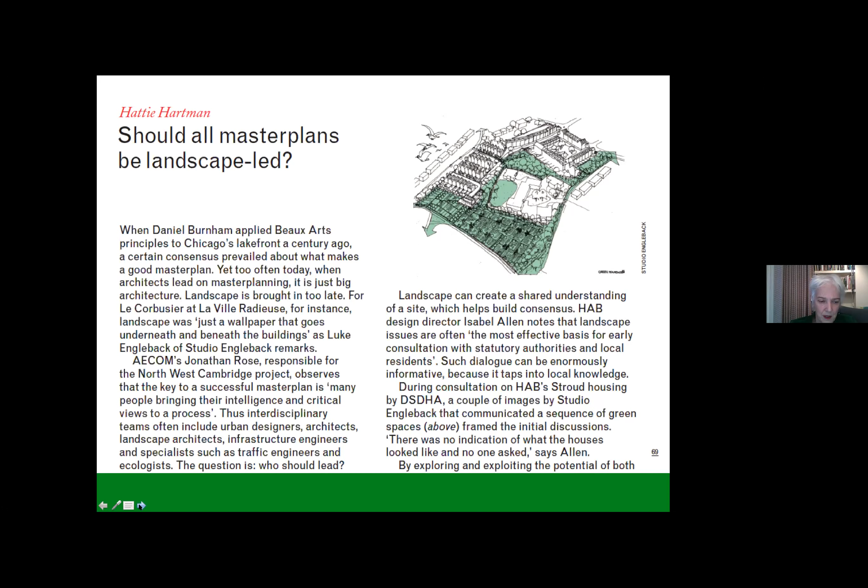And I think this is what we all need to be really cued into. It is sometimes hard to get a client to hire landscape expertise early in a project, just as hard as it is to get the structural engineer and the services engineer in early. This is what I would be interested to hear more from the audience about during the Q&A.

So a few projects—these aren't necessarily my all-time favorites, just a few that I thought I would show you. A really good source for looking at retrofit projects is to look at the AJ Retrofit Awards, which we've been running for almost, I don't know, maybe 7 or 8 years now.

When we started it, nobody really thought retrofit was such a hot idea for awards. Now we are flooded with interesting projects, and they're all on our website, and we get more and more interesting projects as the years go on.

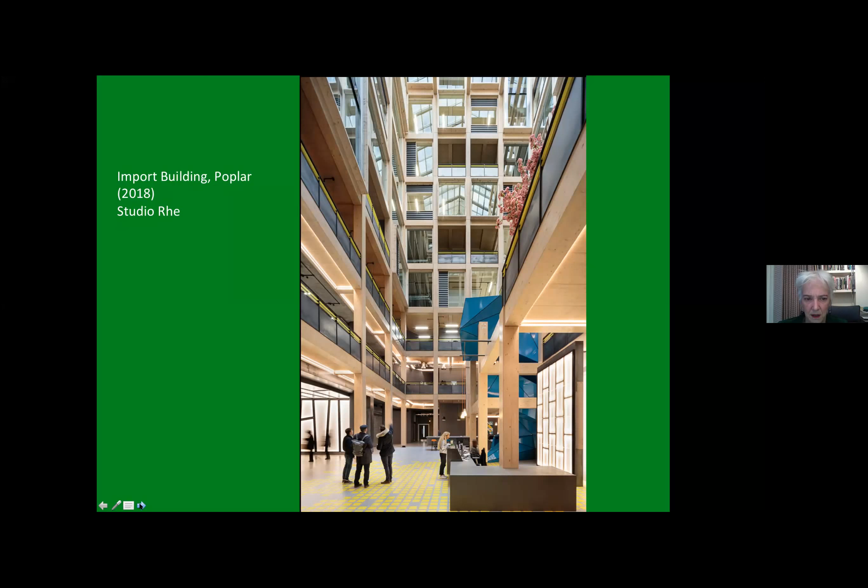Now this is a building that I came across because it was submitted to the Retrofit Awards a couple of years ago, and it is in East London in Poplar. It was a late 20th century underloved office building, and this is the new atrium, all done with CLT. That on the left is the old atrium, and this is what it looks like on the right.

I've spent about 10 years looking at buildings and trying to figure out how sustainable they really are. It's a very tricky question, every time. I went to try to find out about the mechanical plant. I don't know if there's anyone on the call who knows details about this project, but I really tried hard to find out what was done to update it, and whether they explored any mixed mode ventilation, because it's a sealed building, and I really couldn't get many answers. So these things are very tricky.

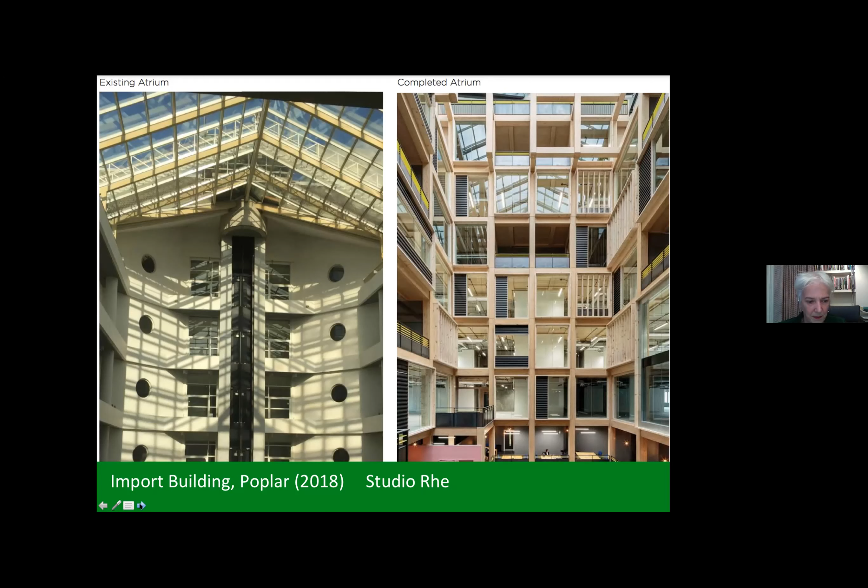This is a project that was on Dezeen last week. I haven't seen this, we can't go anywhere at the moment, but it's a beautiful train station that has been repurposed with, apparently, 12 of these CLT pavilions, which are retail within this shed structure. You can see a lot more details about it on Dezeen.

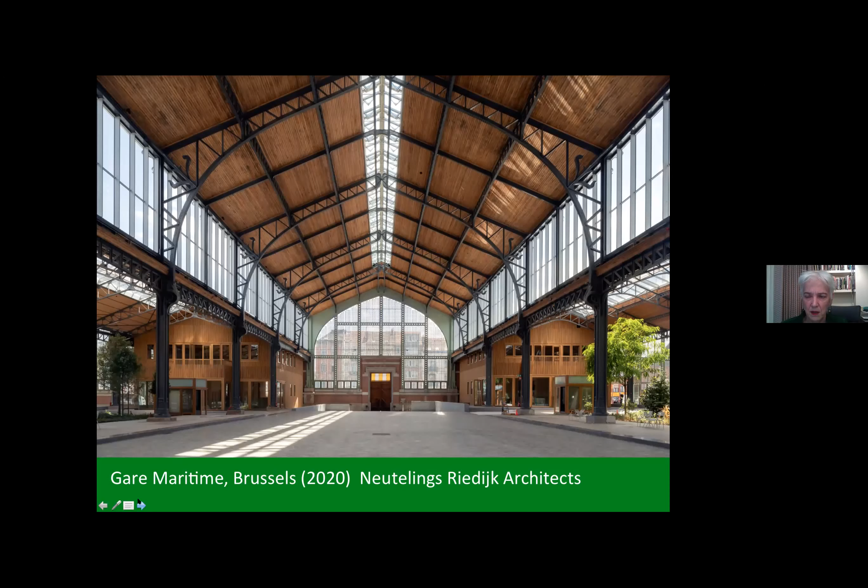I think we need to look abroad more, where sometimes I feel, at least, that I'm in an echo chamber. I have a pretty good sense of the UK landscape, but there's a lot of innovation going on. We need to look at the best projects everywhere.

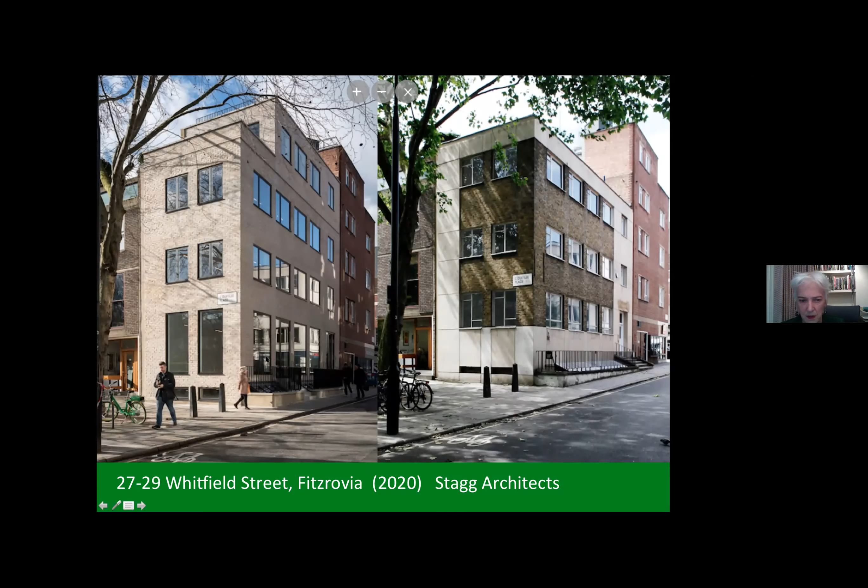Now, this is an example in Fitzrovia. This is just to say they don't all have to be beautiful train stations. They're just simple unloved buildings like this one here on the right that can be rethought, brought up to date without tearing them down. In this case, the render was taken off the facade, the existing bricks were repointed, and a kind of mineral paint was used to give this finish to the building. And this is the inside.

Not every client would want to work in this space, but basically they looked for features that they could keep exposed, and a very thoughtfully and carefully detailed stair that gives a sense of openness to the whole space. That's a detail of the stair.

So it's about the big moves, it's also about the small moves. I'm sure many of you have seen this project, and Marion, one of our panelists, probably knows a lot more about it than I do. I haven't actually been to see it, but this is a Dutch approach to housing retrofit, where a whole terrace was done by Studio Partington, and the residents remained in situ while this was done. It's quite an incredible achievement. I don't know if there are plans to do more of this in the UK, maybe someone else knows more than I do. Here's on the left what it looked like before. I'm not convinced by this pink and purple, but it has given the place an identity.

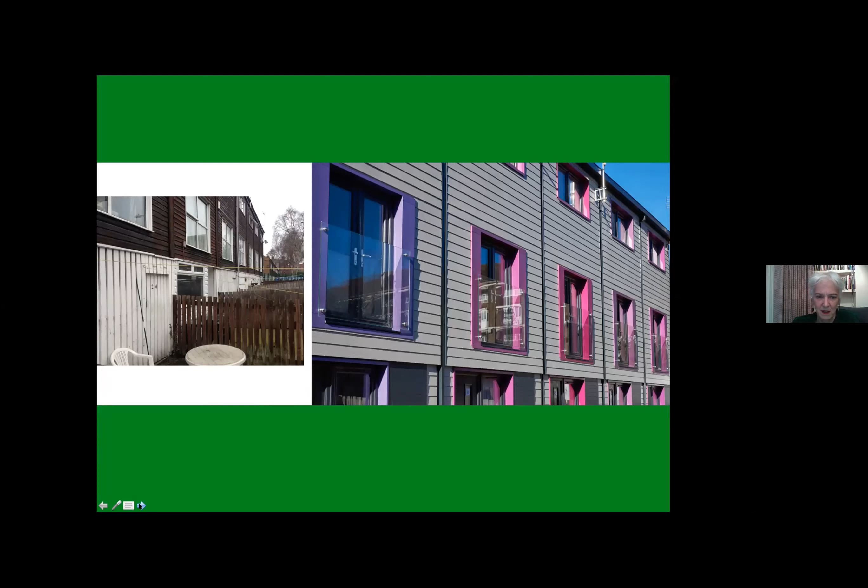Lots that can be done with one-off terraced houses. This is something else we published in the AJ a couple of years ago. It's quite an unusual project. The upper left is what it looked like before, and this is the rear extension—basically a house built around a house. So there are many, many approaches to this.

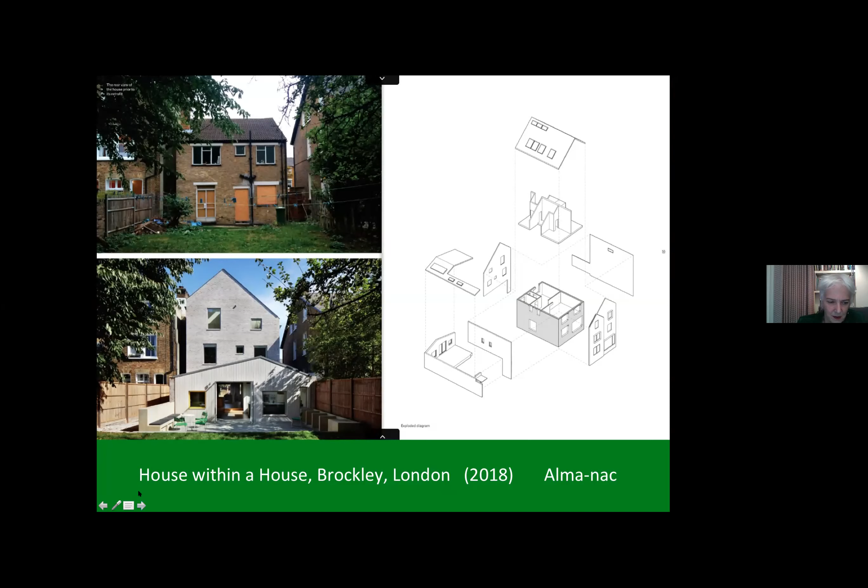There are so many resources out there, I haven't begun to list them. I hope everyone on this call knows the work of LETI, the London Energy Transformation Initiative, and the design guide that's downloadable for free on their website. I think it's been downloaded 15,000 times or more, and I can put it in the chat box. And these are a couple of others, the book on the left by Duncan Baker-Brown in Brighton is 3 years old.

I hope most of you have seen that one. This is a recent Swiss book on the same topic. And then I put this project on as a bit of a provocation that we all need to really think outside the box.

This is by BIG in Copenhagen, where they've put a ski slope and a landscaped walking path on top of a waste to energy plant. I have to say, I was highly skeptical of this whole concept and thought it was just kind of a gimmick. I did go to the press opening, and it's early days, so it's too soon to say, but this is more about the repurposing of land and how to draw people and how to redevelop an industrial site. This was a kind of industrial part of the harbor that had a few activities of this nature, like kayaking or jet skiing, and it gave them the idea to make this a sporting venue.

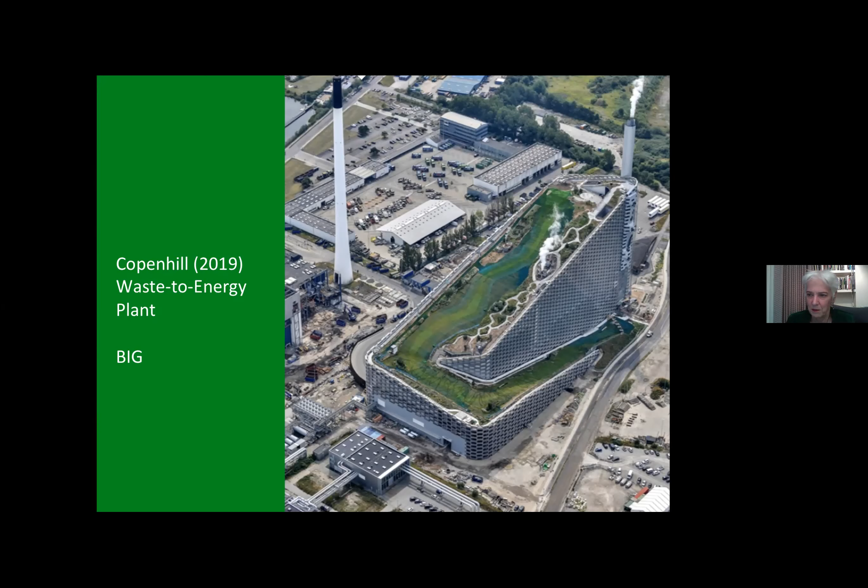We'll see if it works, but I think we need to really be thinking outside the box. And here it is. Fantastic view from the top. This is a landscape path, so you can do it just as a walk, you don't have to do the skiing bit.

Another thing we need to do is revisit our projects and learn from what works and what doesn't work, and this doesn't happen often enough. The RIBA has recently put a big challenge out for post-occupancy, and the book that I've done with Sophie and Judith talks a lot about that.

This is a revisit we did to a Hopkins project in Woking. If we ever get out of this crazy pandemic, I really urge you to go see this project. If you haven't seen it, it's open to the public, there's a visitor center at the front. I thought this was particularly appropriate in terms of putting the revisit message across, but also because of repurposing land.

This project is built over a municipal car park. Below is the car park and above is this 2-story new office, and it's absolutely wonderful inside because you're at the level of the tree canopy when you're inside. They have these 2 huge ficus which have survived, but when you're in these offices, you're looking out into the tree canopy, and it's just fantastic. I love this notion of building over the car park.

And this is what it looks like. I think it was 5 years in. We went back, we talked to people who work there, we talked to the architects, we looked at the energy. It's actually performing very, very well. Their carbon footprint due to flights, because their staff travel so much, was actually higher than the building emissions, the operational emissions, which I found really fascinating.

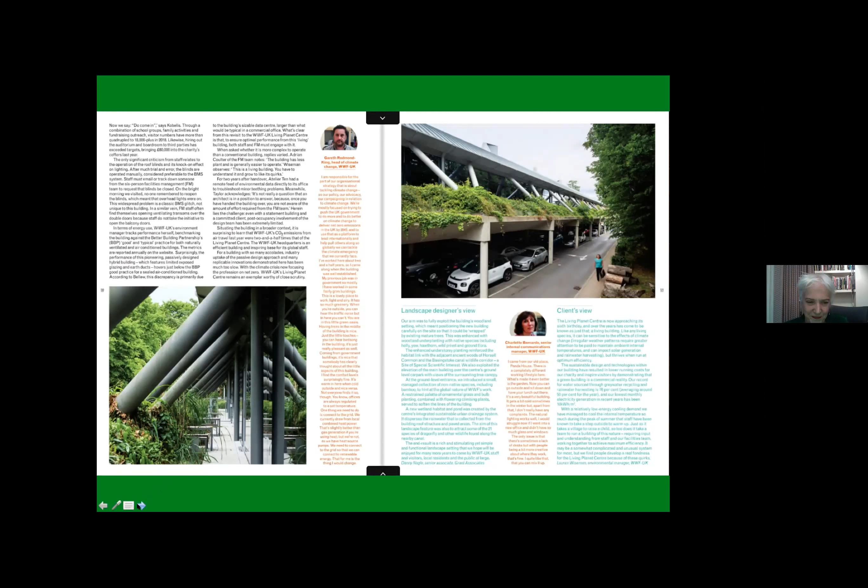Now, many of these things will be so familiar, but on every project, you need someone championing this, or else these things get lost along the way. Every single project, we just have to challenge the client with the brief. We have to examine what are the opportunities for retrofit. Can a demolition audit be done? What can be salvaged if the building itself can't be salvaged?

Use passive design to design out the operational energy loads to the absolute maximum, and also look at embodied carbon. We need to be looking at whole life carbon. Look at exemplars, look at relevant projects, think outside the box, as I said, and revisit, and then share what works and what doesn't work. So those are my thoughts.

I'm now going to turn this over to our first speaker. I'm really delighted. We have a landscape architect, we have a project manager, we have a building service engineer. I've spent my life, it feels like the last 10 years, talking to building service engineers. And we have an architect, Marion, whom I've known since I got started with this, she's ahead of me on this agenda. We don't have a structural engineer, unfortunately. They're very much front and center now with embodied carbon coming much more on everyone's radar.

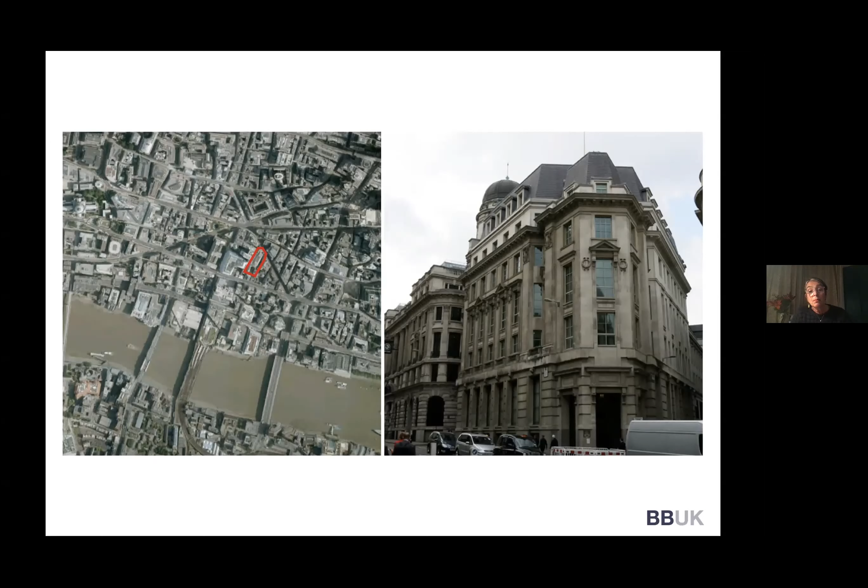So it's a site almost bang opposite the Bank of England, right in the heart of the City of London, the financial area, lots of money, lots of slick offices, lots of suited men, and some women too. But it's a fairly traditional area. This is a very traditional Victorian building that we went to look at with AHMM.

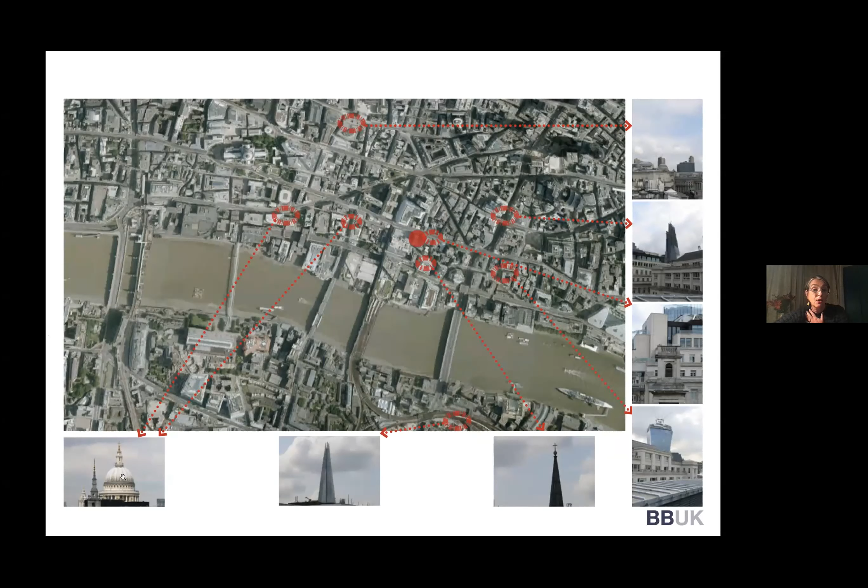It was a roof garden. I think it's slightly the wrong way around. So looking, so from the roof, you could see an iconic building — I mean, amazingly, because it's only about 5 stories high, you can see a lot of London's really iconic buildings, from St Paul's through to the Shard, through to the Barbican.

Fantastic views, but when we went to look at it, the whole of the area was covered in plant, so that you could literally just get around on a kind of gangway around the building to look out to the views. So the concept for the space was to create a square in the sky, from where the views could be enjoyed. The square would be enclosed with benches, and then there would be planting around the outside edges in order to enhance the ecology of the site, and also to frame some of these views out.

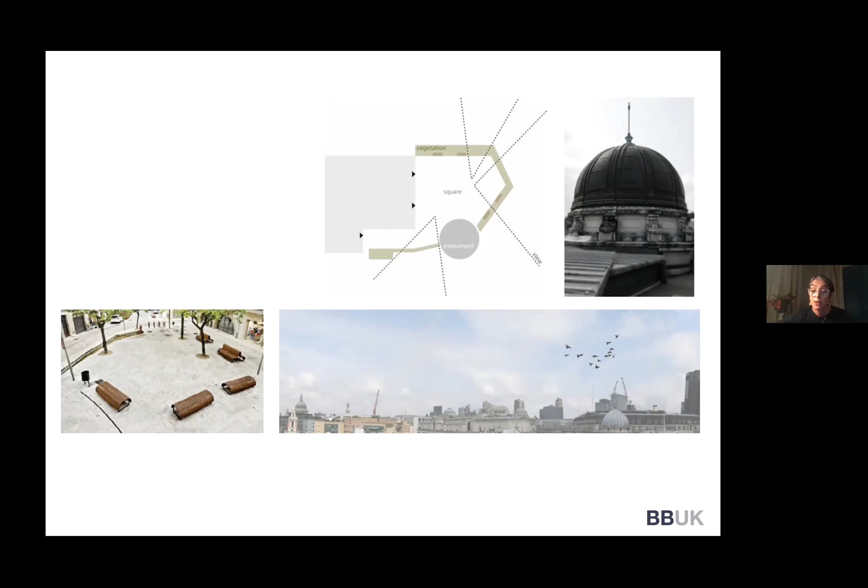As I said, the front bit of the building was being retained. Maybe I didn't say it — sorry, the front bit of the building was being retained. The back half of the building was being demolished. So it was a kind of half reuse, half rebuild.

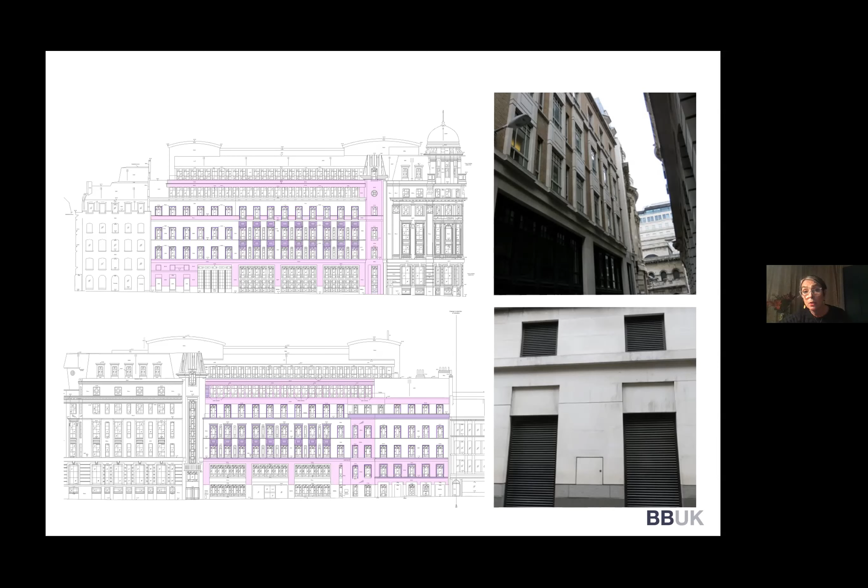But when we went to site for the first time, we were really struck by all this wonderful Portland stone that was facing the existing building. So we did a survey of what was there. We looked at the dimensions of the stone that was there. We worked out the square meterage of what was going to be coming down from the demolished building, and we proposed that this would be used as paving and cladding around the outside of the new roof garden, in order to reuse some of the materials that would otherwise be going to landfill.

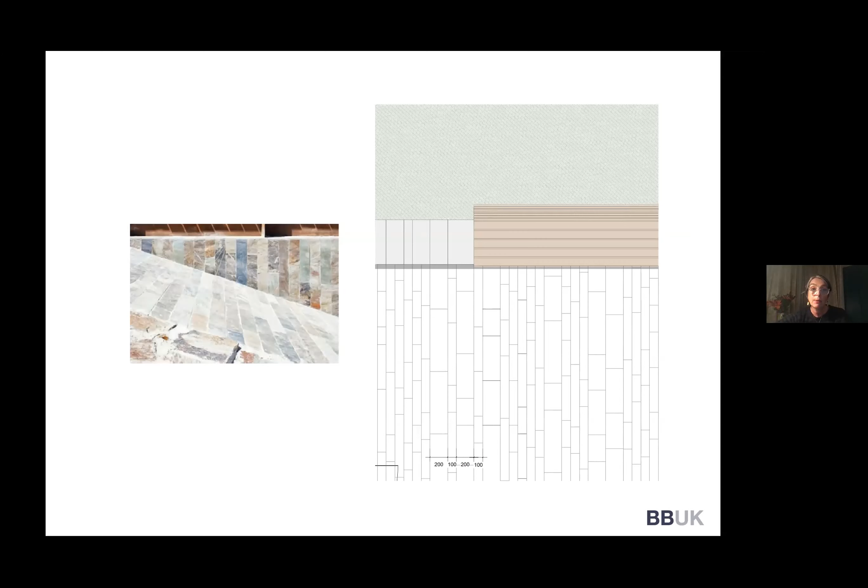So when we looked at the different widths, there were 3 principal widths of stone. So therefore, we set out a paving pattern that would accommodate those widths with a kind of random length, so that wastage could be accommodated. We then returned the paving, so it would run along the floor and then return up the cladding, so that you've got these kind of lines of different widths of paving and cladding going around the terrace. So this was the general arrangement drawing, showing the setting out of the paving, which then ran parallel to the building, but we also accommodated the slightly weird angle kind of prow of the building.

Which went out onto King William Street facing the Bank of England. We were retaining this lovely — it's not really a cupola because it doesn't let light through — this little odd building which could be used for storing stuff. When we designed this space, we didn't know who was going to be in the building.

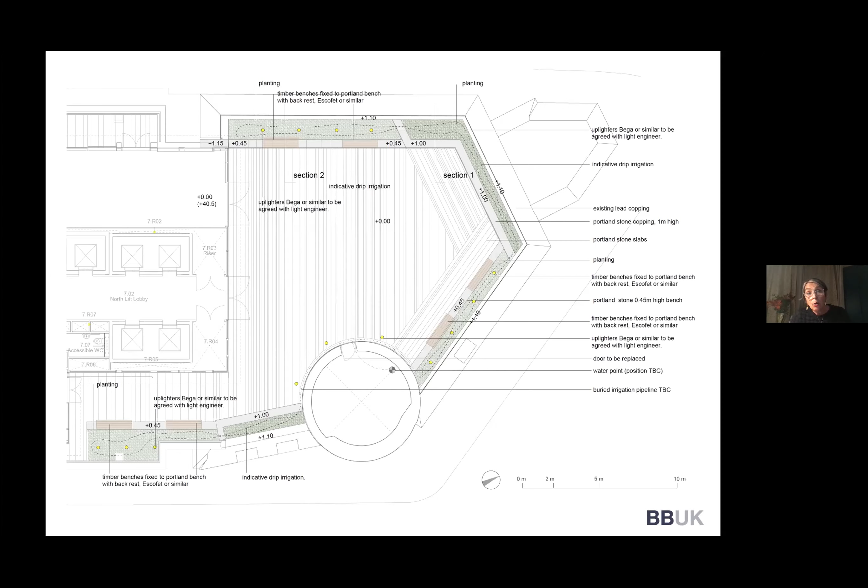We knew it was going to be an office, but we didn't know whether there was going to be one tenant that was going to take the whole building, or whether it was going to be floor by floor. So we wanted to design a very flexible space, but we knew it was almost certainly going to be used for client entertaining, for staff to go out at lunchtime and have their lunch, and perhaps have drinks in the evenings.

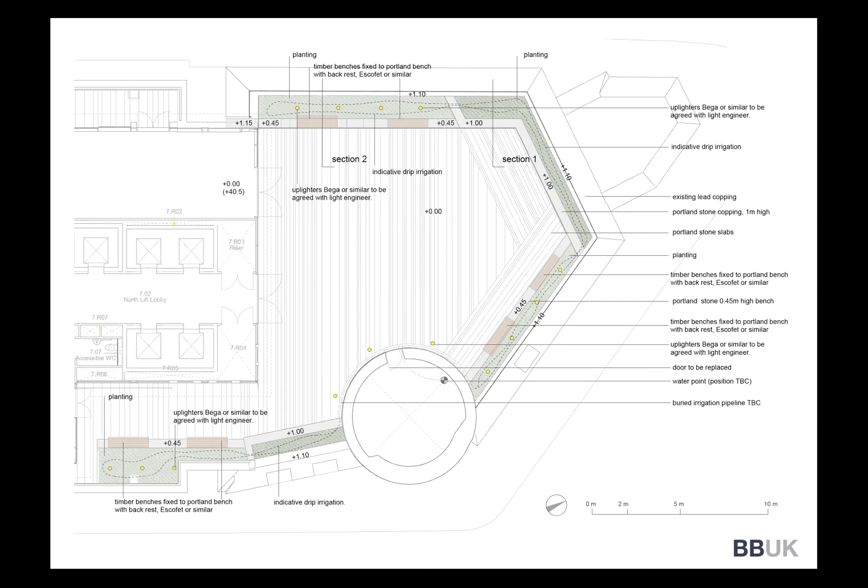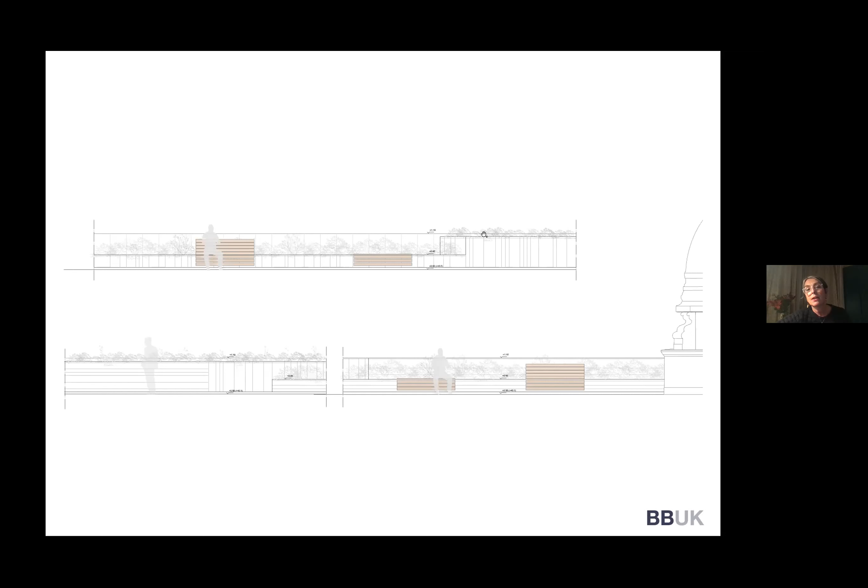So we also designed so the seating around the outside would be a retained flower bed, and then seating so you could either perch on the stone or have a more comfortable timber bench. We then had higher areas which were almost like a bar area, where you could lean, but also that was the parapet for the planting.

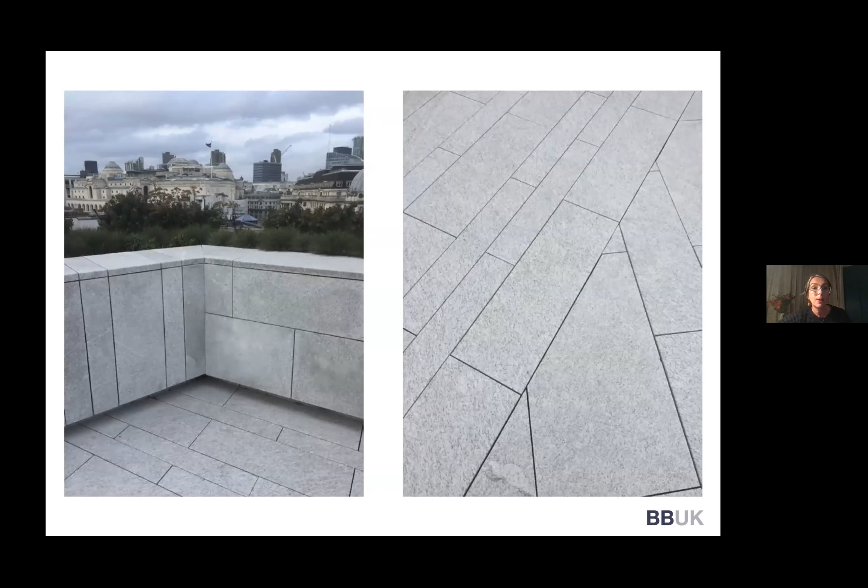And then by contrast, we were appointed - actually it was a mini competition with Mikhail Riches, who were the architects at Goldsmith Street. We did a competition for some infill housing for London Borough of Hackney and were appointed to do 2 sites. This is one of them, Wimborne Street, which is opposite Shoreditch Park - so a lot of open space, but with the barrier of the New North Road between them.

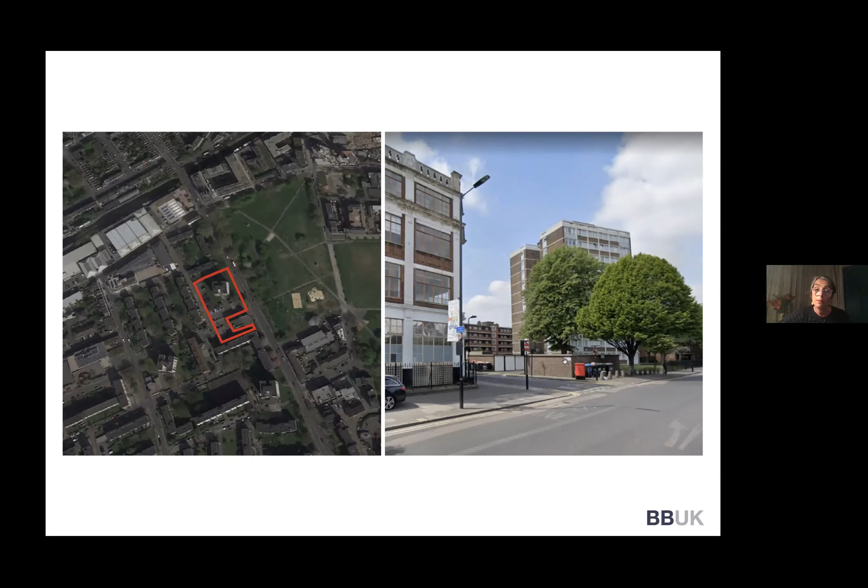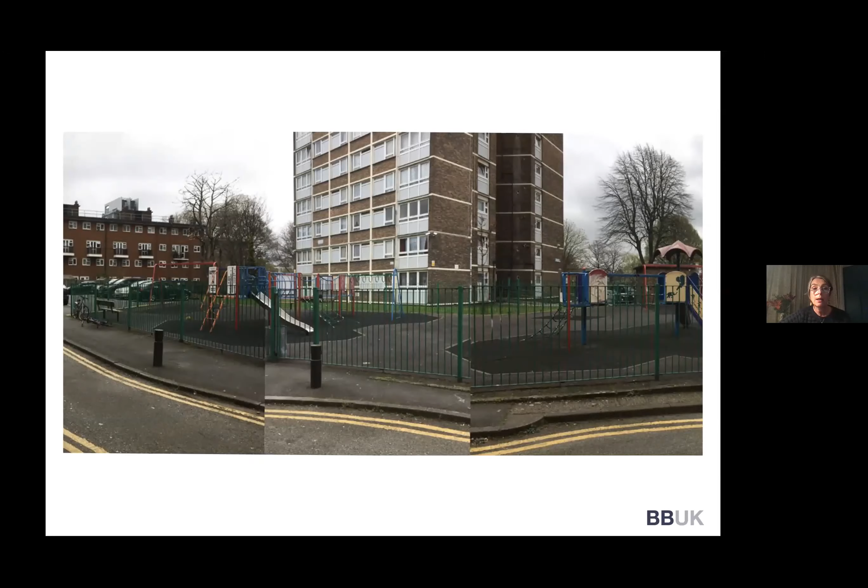So this is what was on the site initially, a really miserable play area surrounded by asphalt, quite a lot of car parking, and then this kind of unfriendly hazard paving to stop the cars straying into the wrong places, more garages, quite a lot of railings to stop you going where you really want to go. So the most direct routes were closed off with railings and low walls - this was the site boundary.

On the left is the site boundary when we were first given the project. So at the first meeting with the client, we said we can't just look at this area and do a little bit of landscape for the new residents. These guys here are losing their car parking, and we're going to need to provide new play anyway. So we persuaded Hackney to extend the site to include the area around the existing tower and all the car parking and the rather miserable play area I showed you earlier.

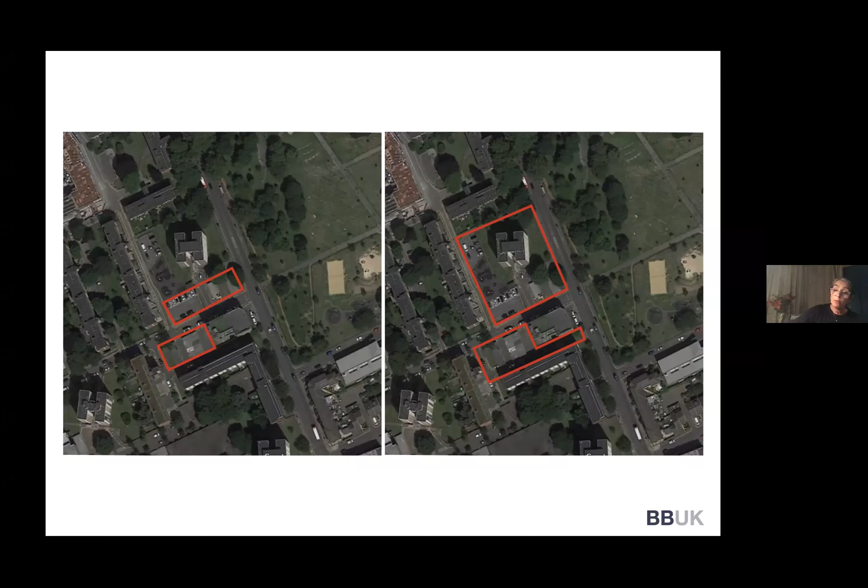So that we could actually do something a little bit more extensive. The existing site plan had a play area, car parking, sandwiching in concrete asphalt play area, storerooms and garages, and then actually quite a generous piece of open land, but it's all amenity grassland. It was all enclosed in 1.5 meter high railings, so it was impossible to get to. And then some quite nice mature trees on the site.

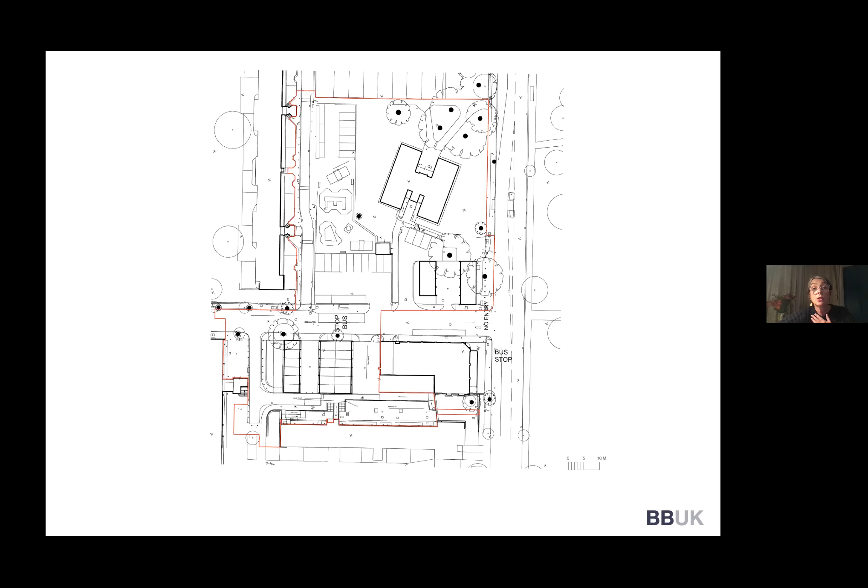So the site plan - I put this in because I thought it's important to look at the trees. We had to take out one of the really nice mature trees, a lime tree, and there just was no way to keep it. We did try every which way, but it was impossible with the root protection area to keep that tree. There was a hornbeam as well, so that was retained. We replaced the lime with 2 more lime trees that now run up New North Road. So actually there's a line of trees that go from pretty well the Old Street roundabout all the way up the road and along Shoreditch Park.

So we took the opportunity of beefing up that single-sided avenue along the left-hand side of the road as you're traveling north. We moved the car park from here, and we moved the play area much further north so that none of the buildings would overshadow it, meaning the play area gets sunlight pretty well all day.

We've put new trees in. We've added SUDS into the edges of the play area and SUDS features so the car park can drain into the play area. We've put in what we're referring to as older people's play, so more fitness equipment and play geared towards teenagers, looking at accommodating something within the landscape that 2 to 90-year-olds can use, to encourage people into the area and encourage overlooking so it doesn't get overtaken by teens, which some people find threatening.

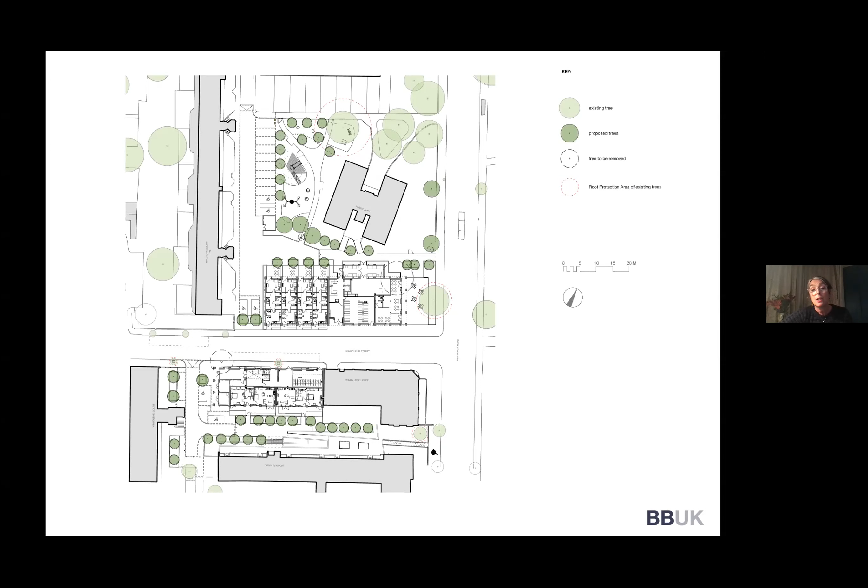So creating again, we took the boundary right up to the edge of these existing flats here, put in new tree planting, and reconfigured the ramp because there were steps and very difficult accessible access into these flats. Another key move was opening up this area here so that residents from the existing blocks and the new block can get straight out to the New North Road to reach the bus stops, and then walk down to Old Street if they need to get to the tube.

This got planning about 4 weeks ago. I think there was a unanimous vote by the planning committee at Hackney, and we are hoping that will get on site sometime next year.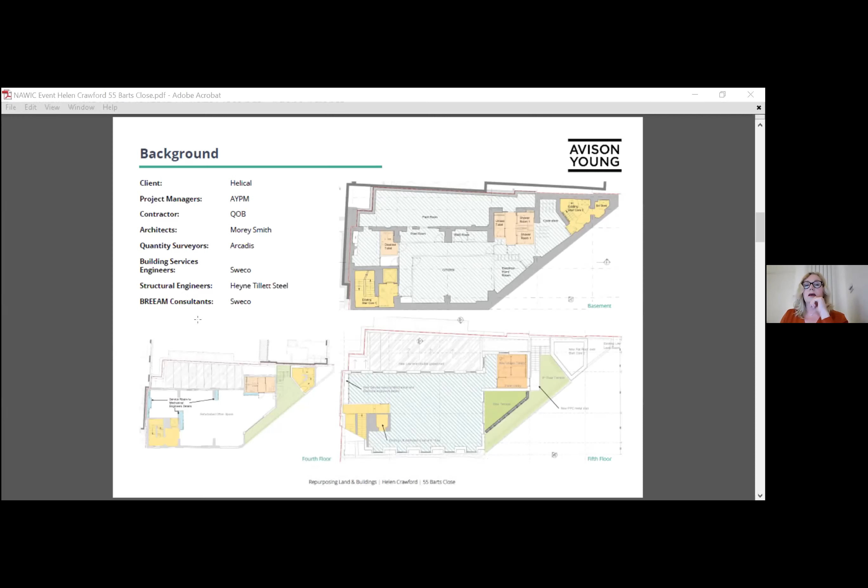The actual project was to remove the roof and add a 5th floor. We also extended the basement area out the back and then added a glass roof on the ground floor, essentially popping out a sort of conservatory, just to create some more daylight for the ground floor space.

We also dropped down the windows. There were some rather ugly PVC windows along the Bart's Close front elevation, and we replaced those and dropped the street scene down so it could potentially also work for retail if appropriate. We also revised the 4th floor layout and created a new lobby to improve the escape stairs. Originally there was one escape staircase, and we improved the second staircase, which also doubled up as access to the cycle area in the basement.

We did a lot of stripping out. Essentially we ripped out pretty much everything, but retained as many of the timber beams as you can see in the bottom right-hand image. We stripped all the services out and upgraded all the windows you can see. When we added the 5th floor, we added windows that were in keeping, and agreed with planners what they would look like.

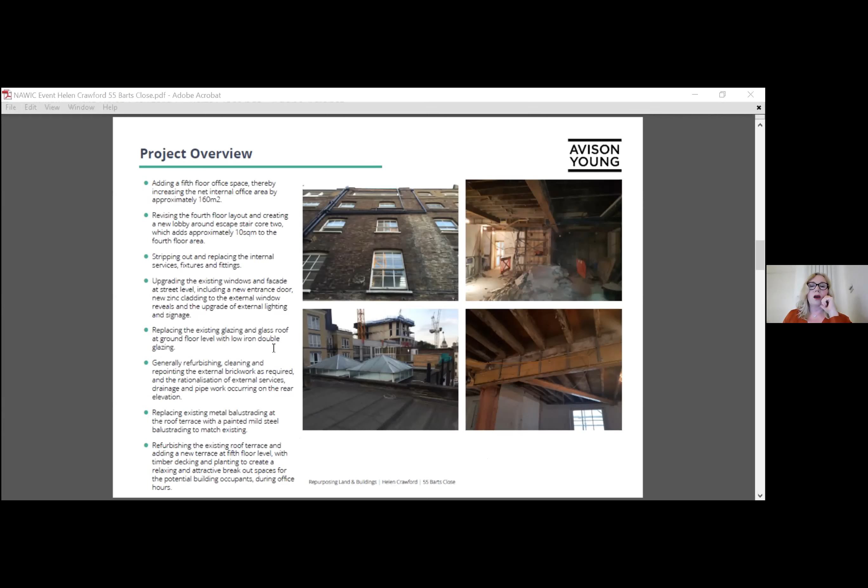So that's the overall project overview and the task we had set out. The overall area is over 7 floors, approximately 11,000 square feet for the end product. We had 2 main contracts: a 6-week strip out contract to take all the welfare offices from the previous contractor, remove all the services - an asbestos survey was carried out prior, and all asbestos present was removed. Then the main works contract, approximately 53 weeks, with a completion date on the 3rd of December 2019. The overall value of the main works contract was 4 million.

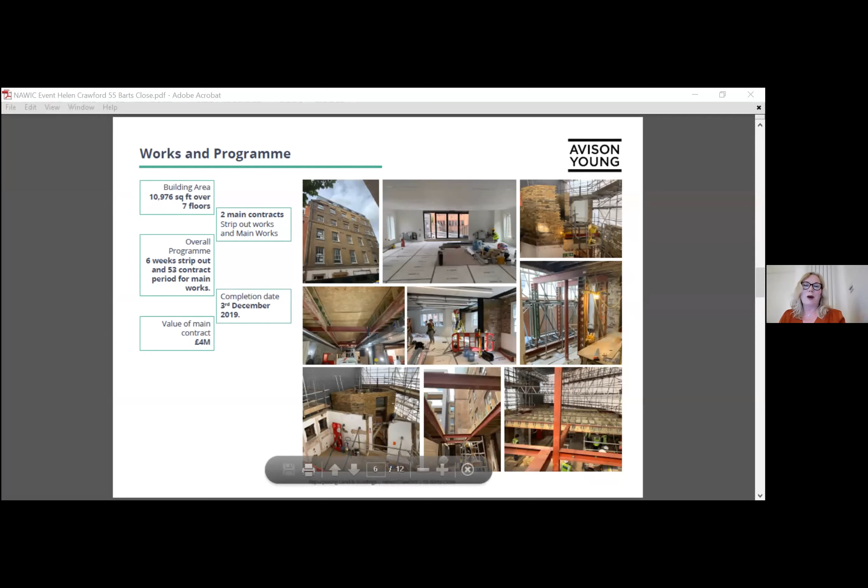So a lot of time and effort was put into this project to keep the essence and keep it in keeping with its surroundings. The images you can see here are just to give you an idea of the scale of the building. I'm hoping you can see these, but anyway we'll be providing you with a printout of them. Let's see if I can zoom in - that's probably better.

One of the things we had to do was carry out a timber and also a steel survey in the beginning. This was quite difficult while the welfare offices were still operating. We had a very tight time scale to go back in and carry out the brick, timber and steel surveys.

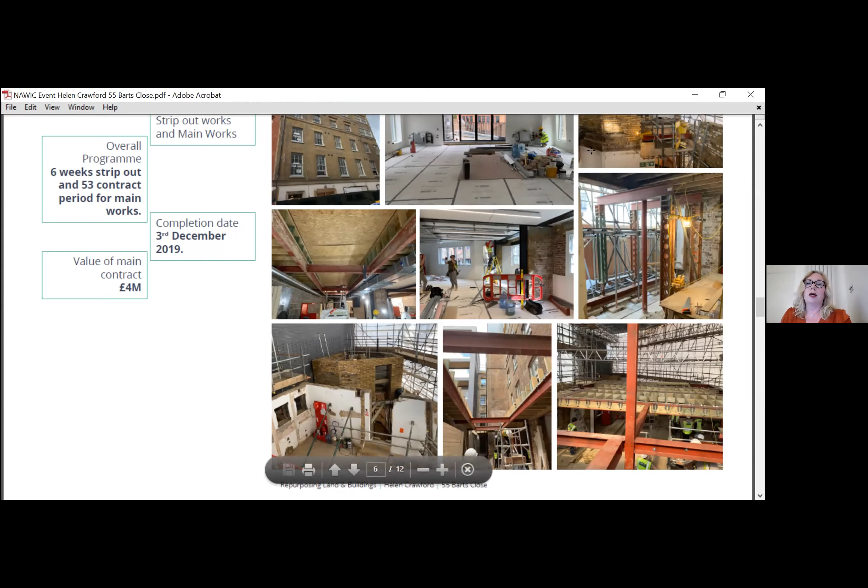So when we went to contract, we knew as much as we could know, but unfortunately, when we started stripping things out, we found that things were not as they seemed. We had to get the structural engineers to do some quick changes to the designs of the steels, and we did find we had to add some more in.

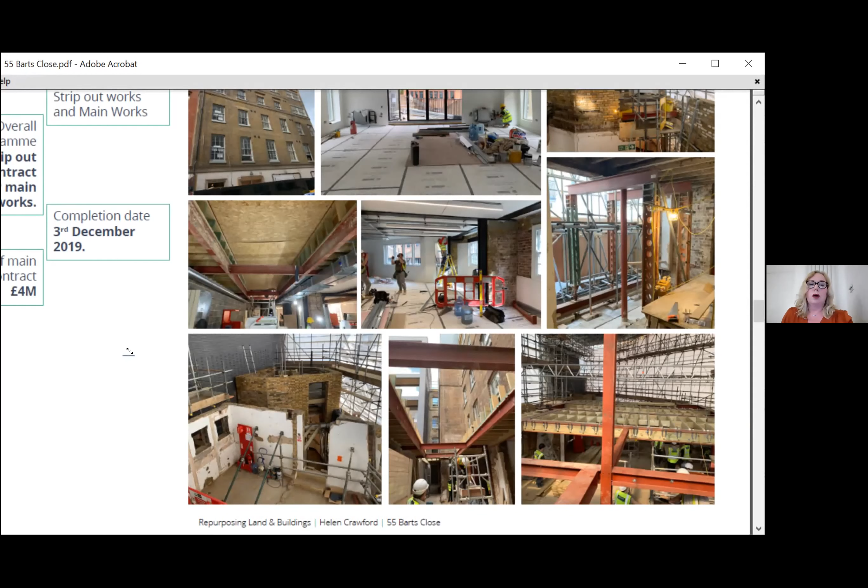The bottom right-hand corner shows the steels to support the new roof. The middle picture is the extension to the ground floor, where we created a nice glazed section for the ground floor area, so we could have daylight coming in, creating a much nicer space for the modern office. And now that I've expanded it - hold on a second, there we go. That's it.

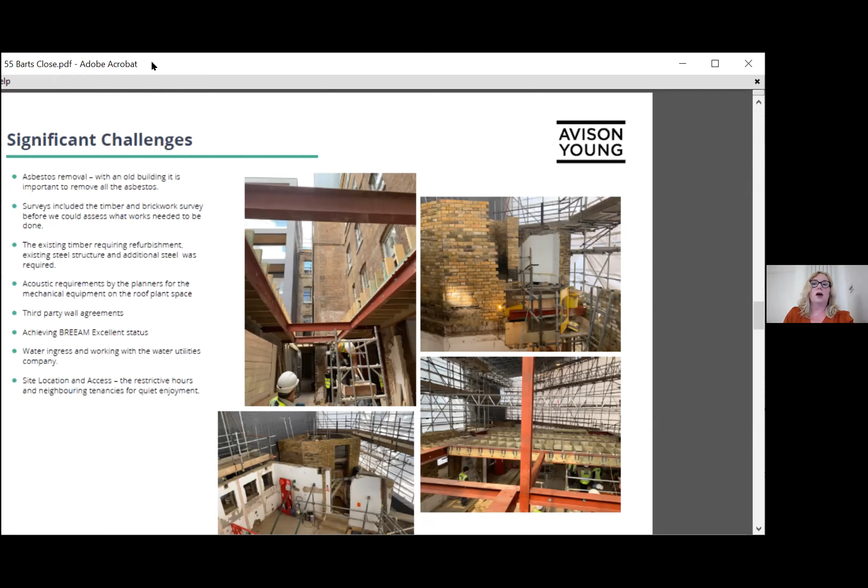As you can imagine, with a project of this size, especially with the time period we had, plus we didn't have an empty building to survey when drawing up all the contract particulars, it was difficult for us to know everything from the start. But we had an excellent relationship with the client, who understood the nature of the beast we were working with. So, some of the challenges: asbestos removal - as you could imagine, with an old building, it's important to remove all the asbestos.

Got about a minute, Helen. Okay, thanks. After that, we did discover when we were lifting some floors that there was a little bit more that needed to be removed, so that had to be done.

We also had acoustic requirements for the new plant on the roof that needed to be dealt with. The close proximity of the neighbours meant third-party wall agreements were very important. Fortunately, Helical owned the building to one side, so that was relatively straightforward, although there's obviously different owners. We also set ourselves a target of achieving BREEAM excellent status for the refurbishment project under the 2014 timeframe.

Fortunately, we were successful in achieving that. We also suffered water ingress from neighbouring water leaks. And as I mentioned before, the site location and access, the restrictive hours, also neighbouring tenancies - the minute something happened, naturally, if you've paid £1.5 million for a one-bedroom flat, you're going to get on the phone to the City of London.

So just to finish off, just the outcomes. There's some images here. We've got a Cat A refurbished building. It retains its lovely, unique character. We've kept some exposed brickwork, retained the steel beams and the sash windows, giving a historical context to these modern and efficient interiors. The additional floor space has added value altogether and made the amenity and office space more attractive. We also added WCs and kitchenettes on each floor.

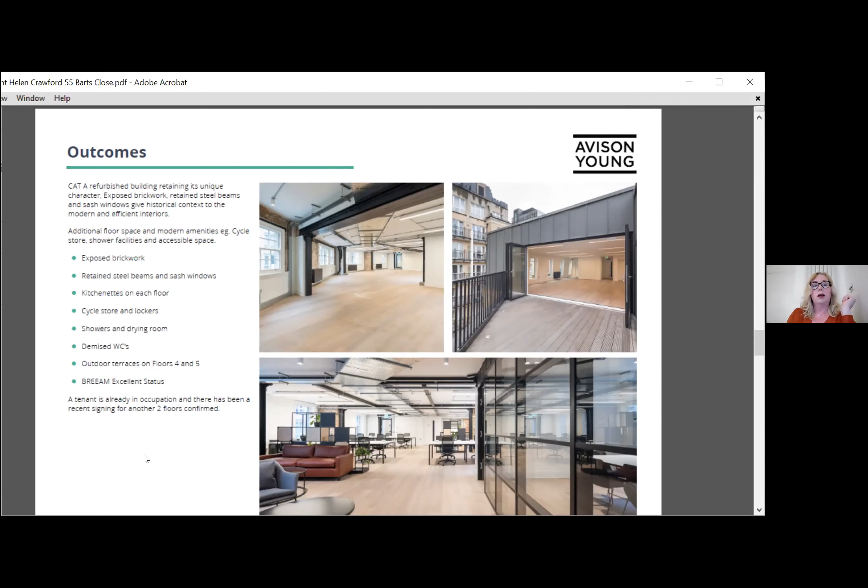We didn't know if there'd be one tenant for this building or multi-tenants. As it's turned out, we have let the 5th floor, which is where you see this attractive bifold door arrangement, and also the basement and the ground floor has been leased more recently as well. And we've just sent our application in for BREEAM excellent status with a point score of 72%, and the EPC rating for the building is a B rating.

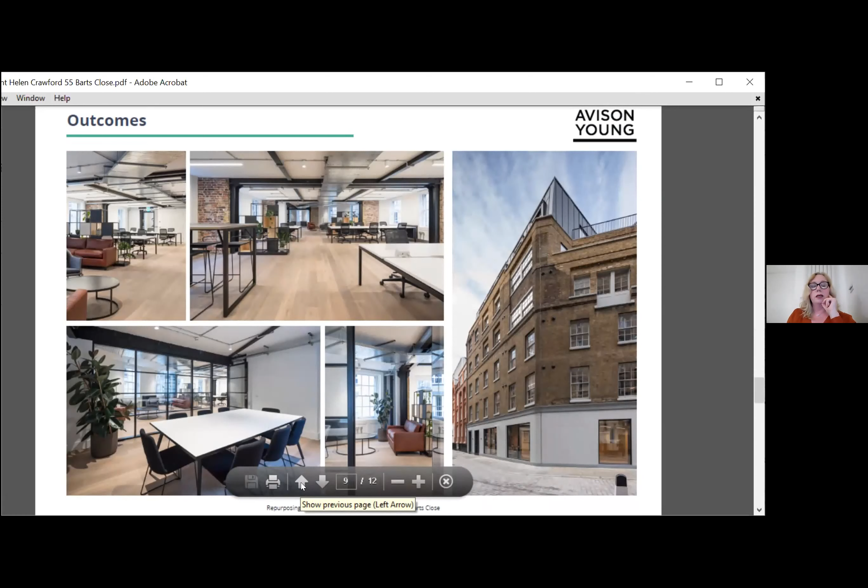And that is pretty much just flicking through some pictures here. You can see the bifold doors in the middle, and this is the end product on the right hand side where we've managed to retain - and you can see the drop down large windows on the street side with the ground floor tenant, which gives an attractive office space, and that space has just recently been let, so we're very pleased about that, as obviously our client is. So thank you, that's me. I'll stop share now.

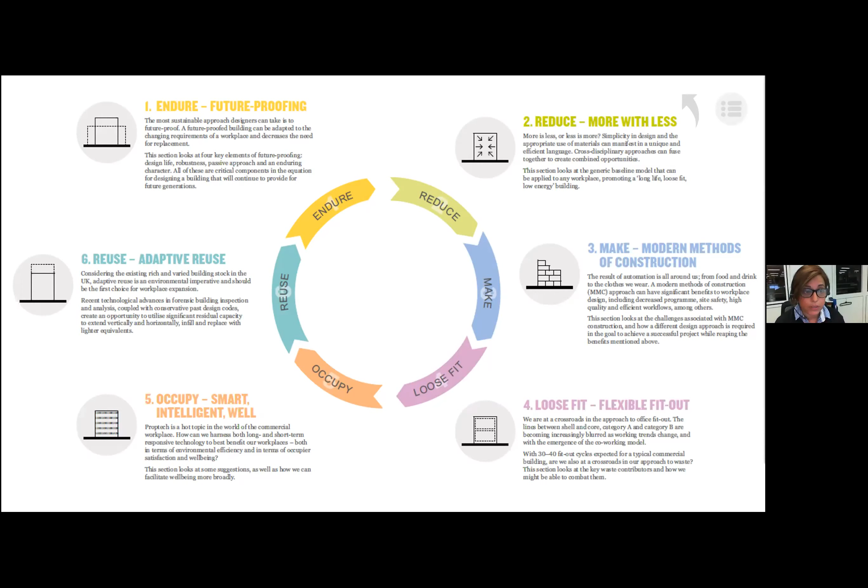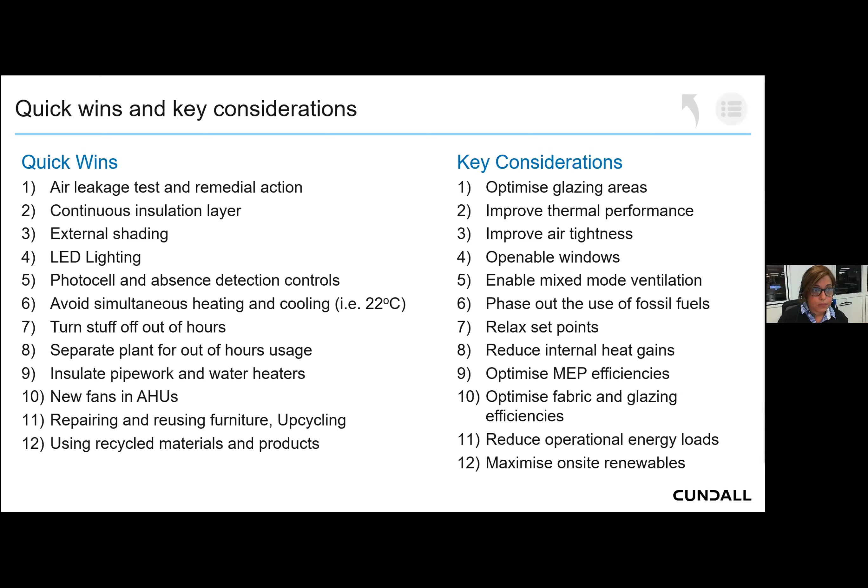One of the other topical subjects I wanted to highlight, as we progress through this pandemic, is the trend towards health and well-being in a post-pandemic world. I'm finding it's becoming quite relevant as businesses are using this opportunity to repurpose, adapt, and pandemic-proof their workspaces.

I've been speaking to a few occupiers, and I found that although everyone was initially quite excited about working from home, I think that's starting to wane off a little bit.

A few organizations have carried out working from home surveys, and I think what we're seeing is staff still have a very strong connection to their workplace. I suppose some of this is habitual as well - it creates that routine, day-to-day activities.

Some of the findings in the surveys indicate a number of factors why people are missing the offices. Perhaps it's the lack of suitable workplace set up at home, lack of human interaction outside your personal circle of friends or family. But also one of the top things on the list was being unable to switch off at the end of the day and put work away to start your evening and rest time.

The surveys also indicated that staff or occupiers wanted to return to a flexible, more agile workspace, with sophisticated prop tech technology incorporated within the spaces. They also touched on creating that human factor in design to create a sense of empowerment and a cohesive communal space.

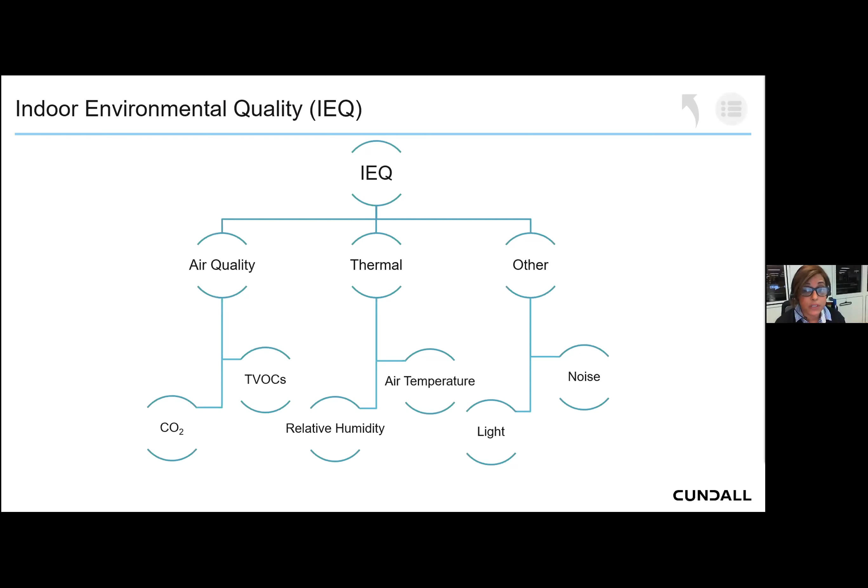Talking about prop tech, we're finding that lots of occupiers and employees want to understand what's happening in the space. Having an indoor environmental quality setup with sensors that tell you what's happening in the spaces gives occupants understanding of their workspace, and having this shown on a monitor gives them reassurance that the space is being monitored and not detrimental to their health.

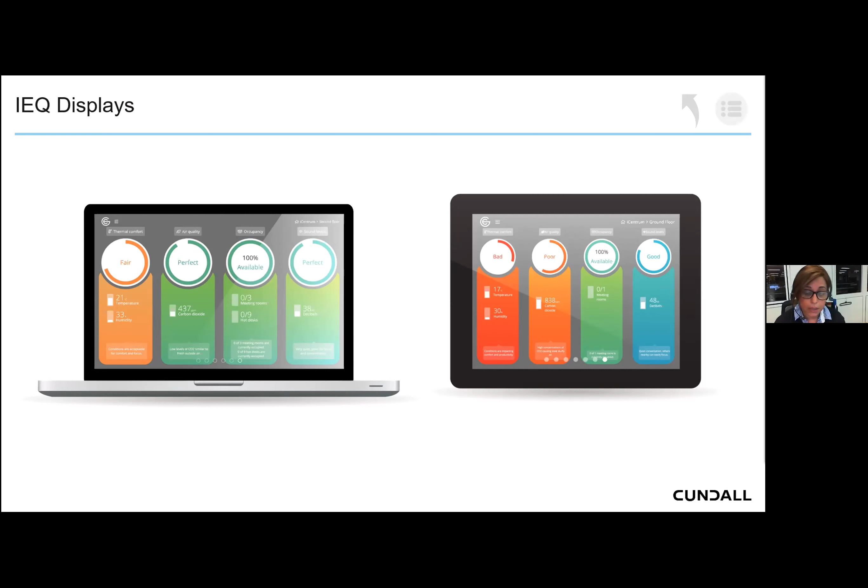Here's an example of a monitor we've used on a couple of projects - this is just a graphic image of it. This is also beneficial to asset managers and landlords, to display their well-being credentials and use as marketing collateral. Last but not least, if you don't know where to start, the WELL Building Standard or even the health safety rating is a big driver of creating healthy and sustainable spaces. Have a look at that, and if you have any questions afterwards, we can pick them up in the Q&A session. Thank you very much.

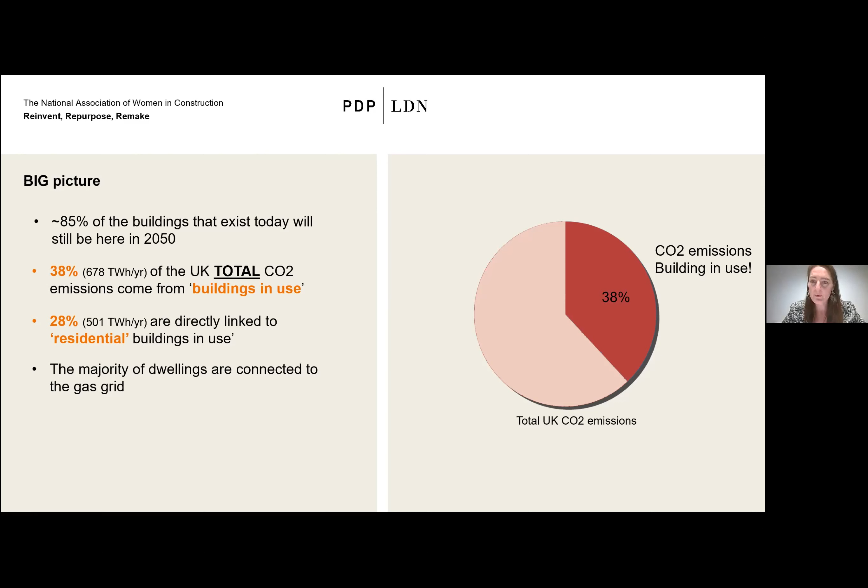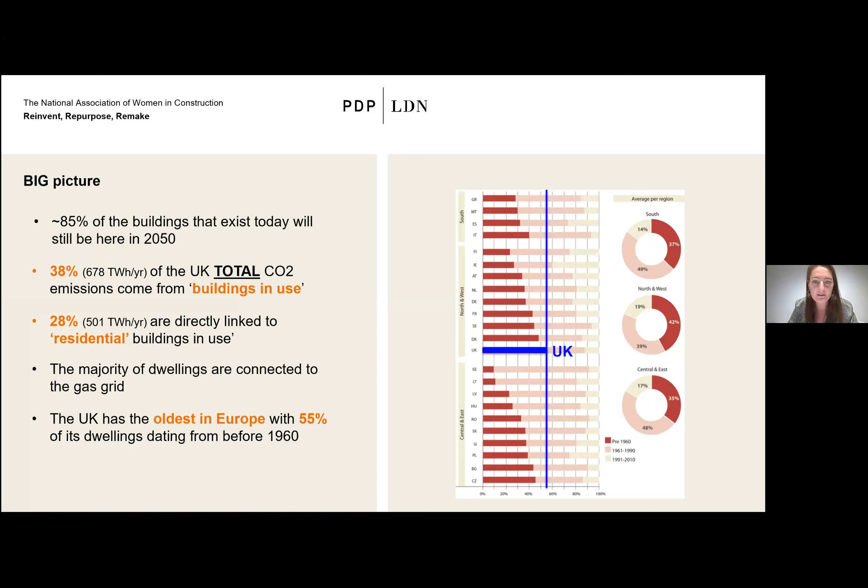The key here is also to acknowledge that we have the oldest housing stock in the whole of Europe, so we have a particular problem to address. We also have a historic stock with a lot of character and lovely features, perhaps less present in the core continental housing stock. So we need to understand that despite its cultural and aesthetic value, it's also very inefficient - solid wall, uncomfortable, and contributes to climate change because about 83% of houses in the UK use gas for central heating.

It's very expensive to run and can also affect people's health. The cost to the NHS of treating illnesses related to poor housing conditions is about £26 million a week. So if we were proactive rather than reactive, we could be a bit smarter with our buildings and our NHS. As I said, it has huge cultural heritage value, it also has economic value - we're very fond of mortgages and ownership in the UK - and it also has a carbon sequestration value, since there is a lot of embodied carbon in our buildings which we should acknowledge and retain.

So what can we do? We need to look at retrofits in the context of regenerative design and have a comprehensive view of the climate change challenges for us - embodied carbon, building fabric, comfort, a lot of things. We need to prioritize occupants' comfort and health, especially in times of COVID - that becomes even more important.

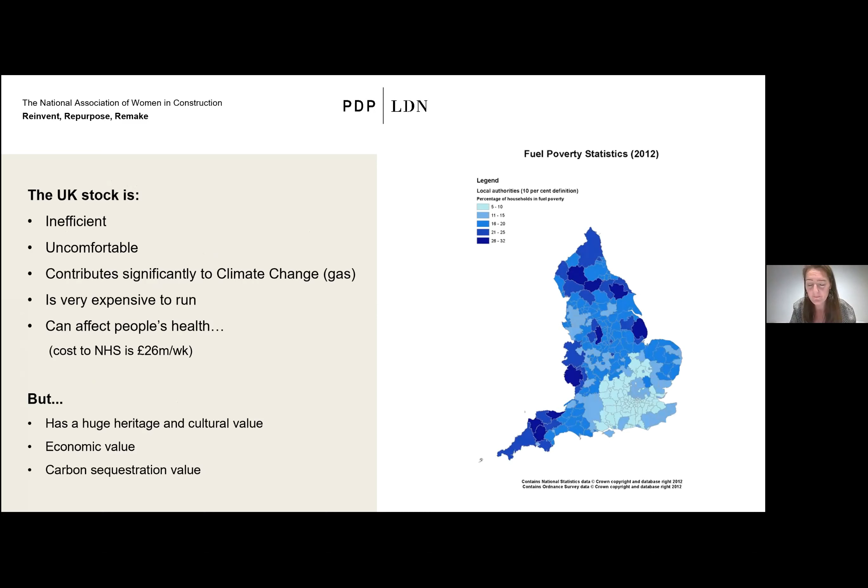Future-proof residential stock against fuel poverty. The previous map showed the areas where people suffer the most fuel poverty, when you have to basically choose between eating and heating yourself. It's a really widespread issue in the UK, which we need to address at the same time as climate change through building comfort.

One thing I wanted to stress, as Hattie mentioned, is that I've been working on this topic for a bit more than 10 years now, and the examples have been there for more than 10 years. What's happened in the last 10 years? Not very much. So I think this is the wake-up call. Hopefully in the last year, climate change has risen to the fore of attention for a lot of people, so hopefully we're going to get on that curve.

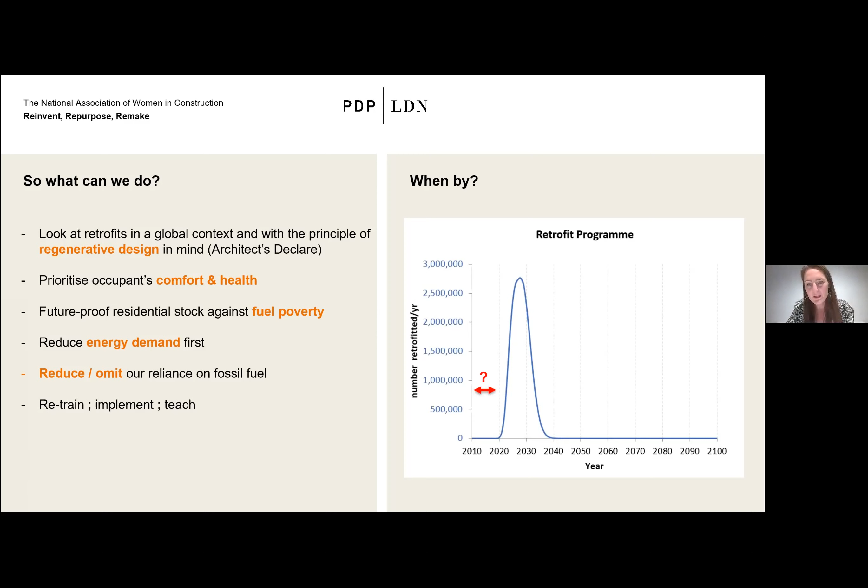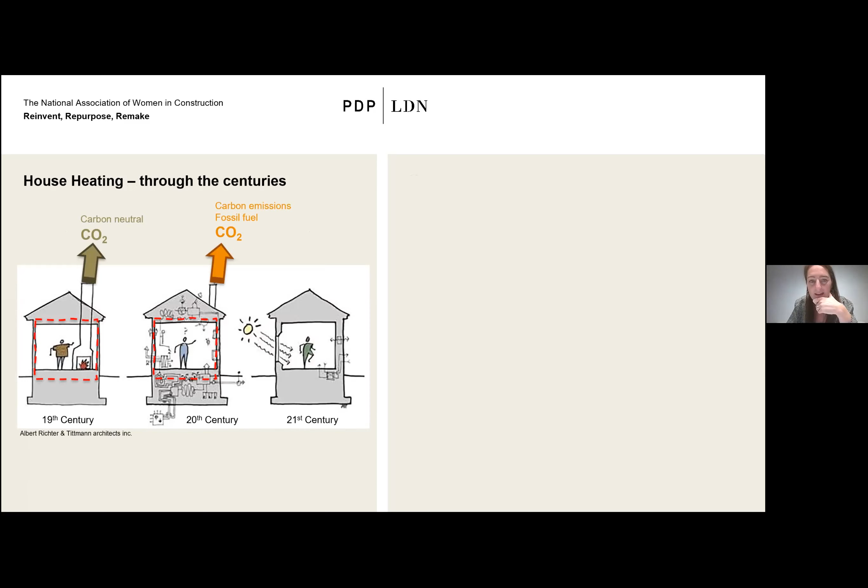So why do we need to get on that curve? Because in the 19th century, we just needed warm clothes, wood, and fireplaces—we were carbon neutral, more or less. In the 20th century, we chucked a lot of systems at it, like central heating, but we used fossil fuel. So now we need to go back to being more clever, making our buildings more efficient in fabric, and using only renewable energy systems.

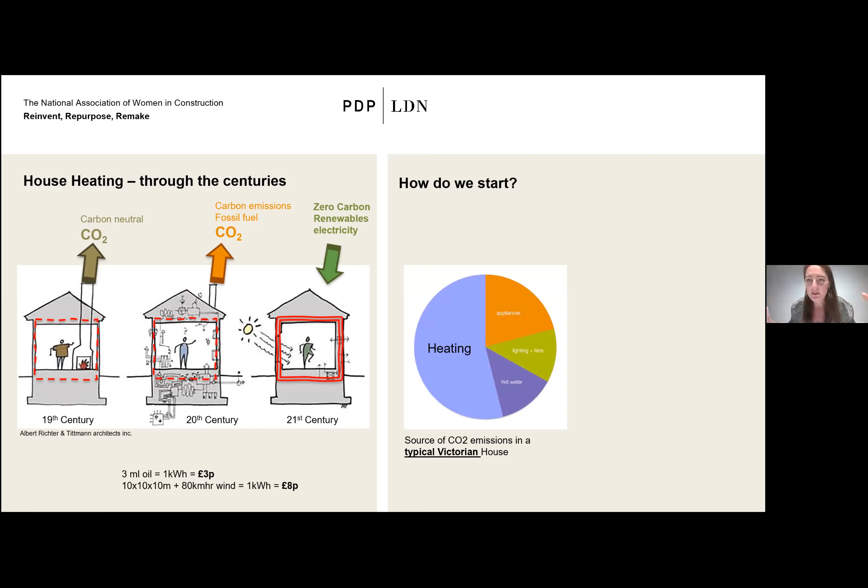So how do we start? I know it's daunting, and I've put a really difficult picture here for you, but the truth is we can do it, we know how to do it, and it can absolutely be done. We need to tackle that portion of heating and reduce it drastically, mostly by trying to avoid having a boiler, or minimizing its use by increasing the performance of your building fabric. That is priority number one. And obviously, when you insulate, you ventilate.

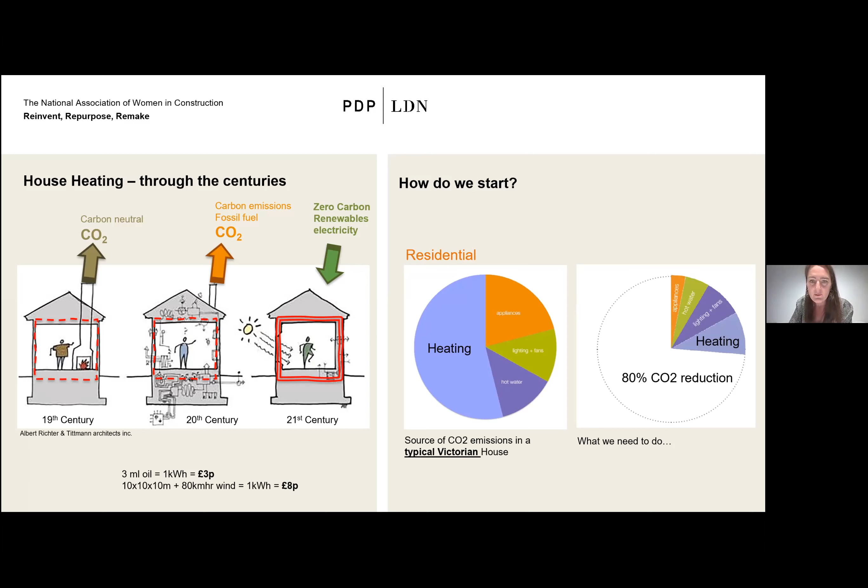I'm going to go back on this—you have to retrain, it's really important. You're not going to go back to your desk tomorrow morning having learned everything about net zero carbon in a 10-minute chat. So I've put here retrofit coordinator course, Passive House Trust, BRE, the Green Register, AECB, Stroma. All of them provide courses to teach people how to do net zero carbon, and in particular retrofits. So get on a course and you'll be absolutely fine.

It's quite fun, actually—we've done it in the office. Instead of sending one person here or there, I brought the trainers into the practice, and we trained 15 people at once. It's a very efficient way of doing it.

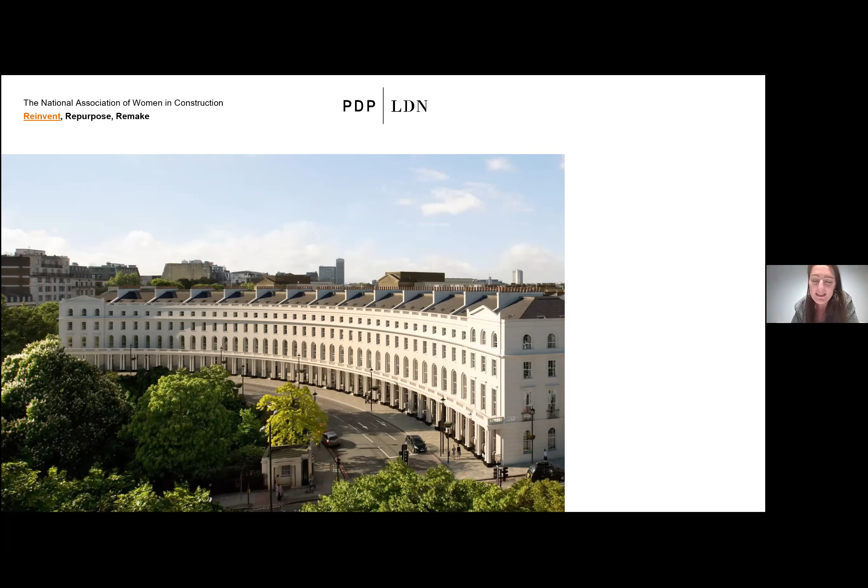In practice, as Hattie mentioned, I do single Victorian passive houses, but I also do this sort of project—about a 120 million, Nash grade 1 listed facade, which despite its appearance was bombed in the Second World War, rebuilt in concrete, and then we took it on when it was in poor condition. We demolished it and rebuilt it to identical. So this is a brand new building, grade 1 listed. I've put it into the 'reinvention of buildings' category—this is what it used to look like. In effect, it's a sort of new building, but rebuilt with partly old techniques.

In this picture, you'll see two blocks sticking out of the curve. These are actually existing, retained—we haven't touched these, they've been there since the 1960s. So sometimes what you see isn't really what you think, is not exactly what it might be. You have to really understand the complexity of what you're looking at and the history. But we retrofitted these blocks as well, as part of the project.

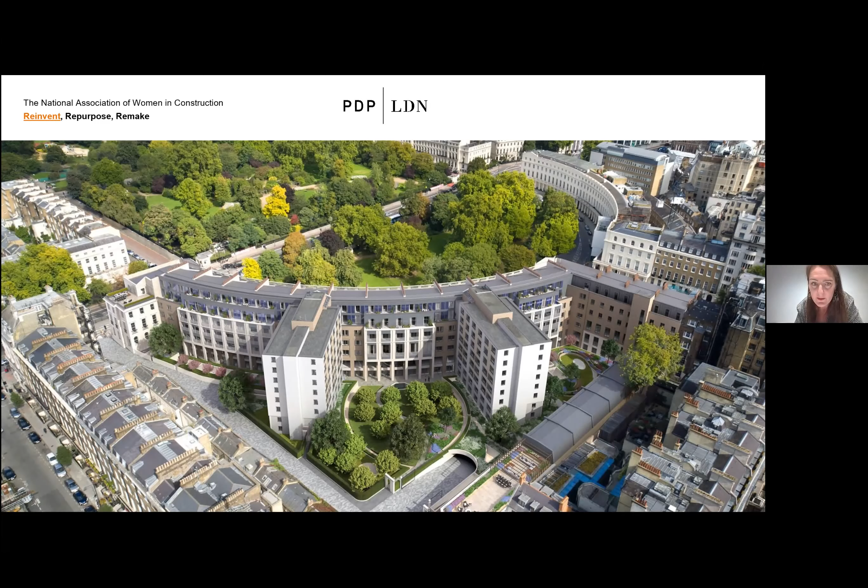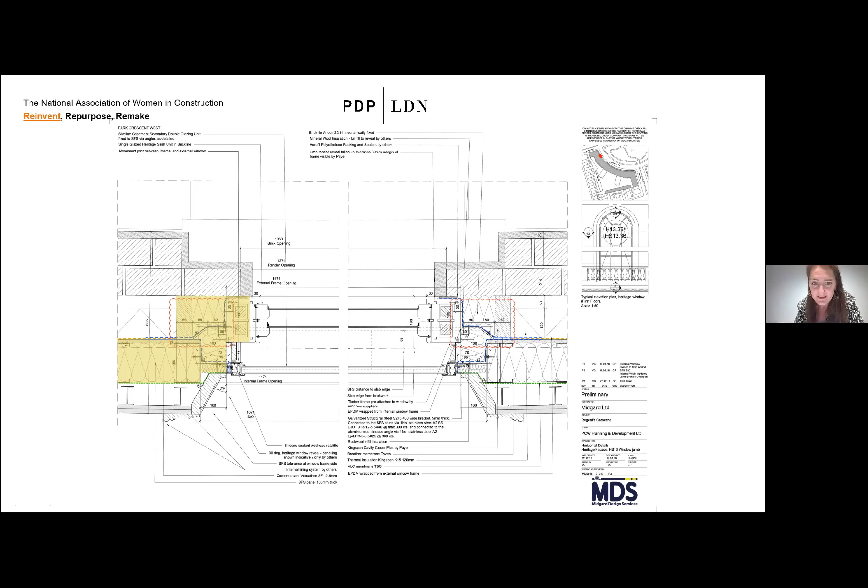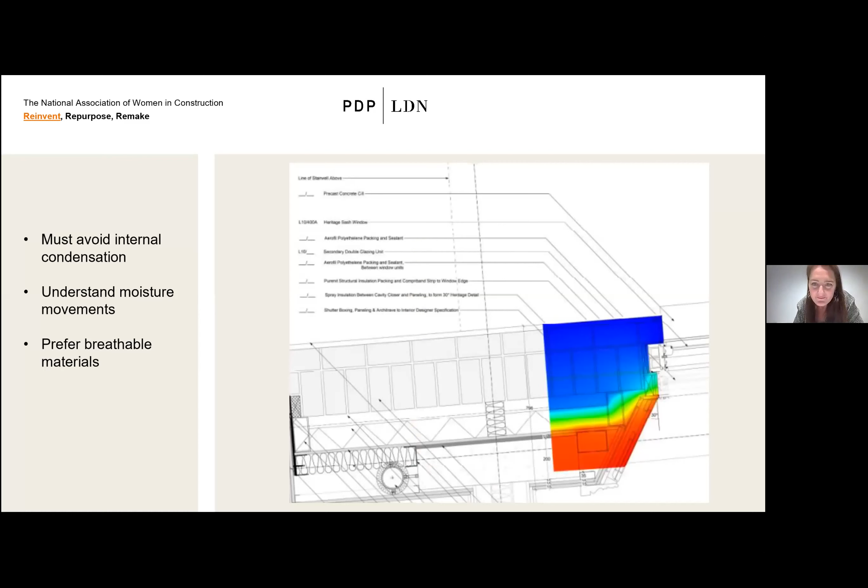Who's the client? Who owns it? Can you say? Sort of private individual property owners who owns a few things in London, all obsessed with Art Deco, a trained architect.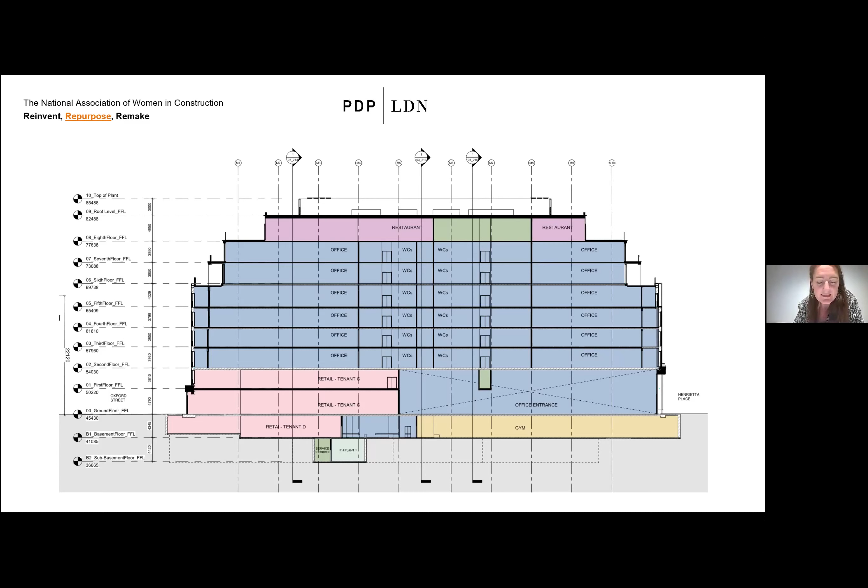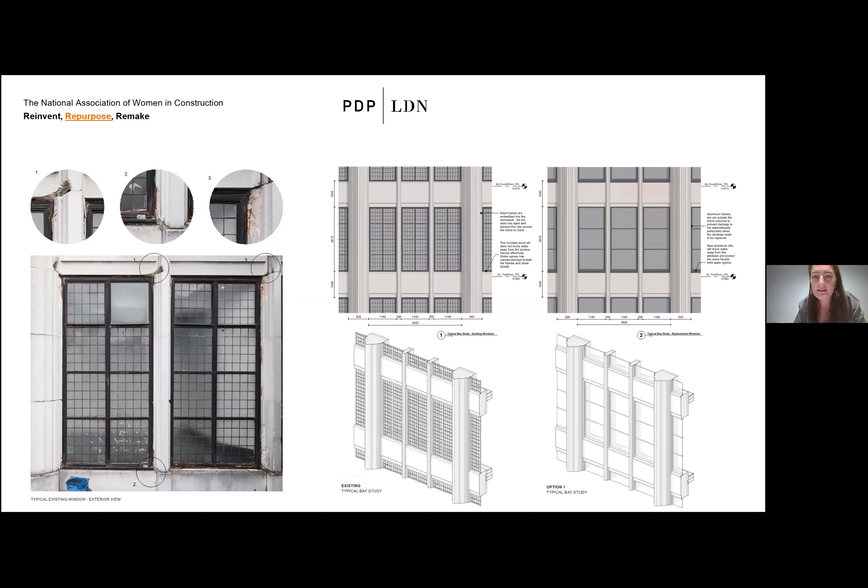Very interesting. I'm going to skip through the fabric, but obviously reworking the meaning of the original design meant the glass was obscured - it was a lingerie shop and they didn't want people to see in, but they wanted the quality of light. Now the purpose is different, we want the light in, etc. So we have to remodel the facades also. This is about pushing the boundaries, about remaking a new building within an existing building.

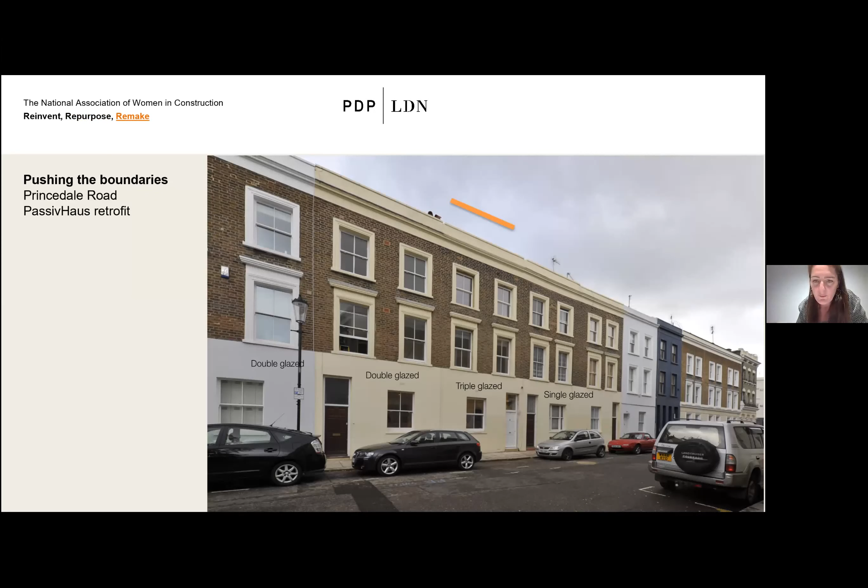So this is a Princedale Road project which has been certified to Passive House, and it's about applying the 5 key principles of Passive House: insulation, triple glazing, ventilation, airtightness, and thermal bridges.

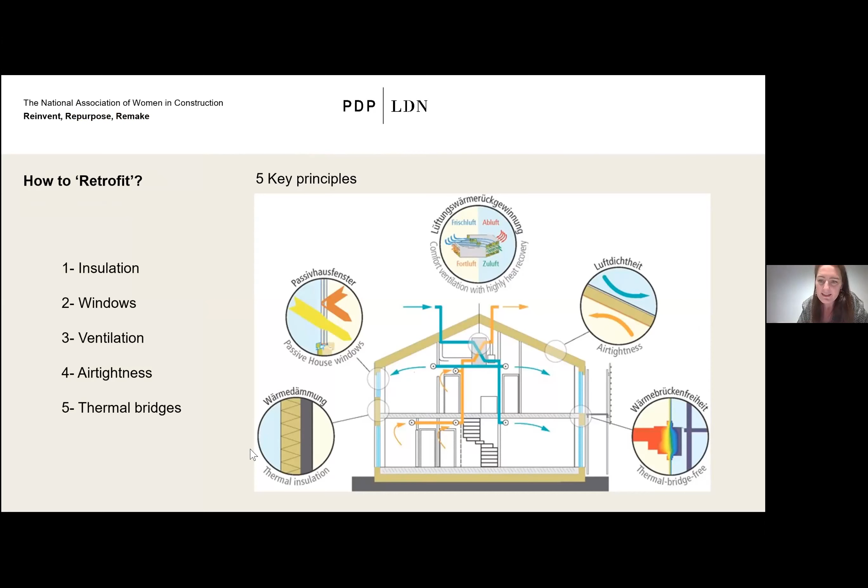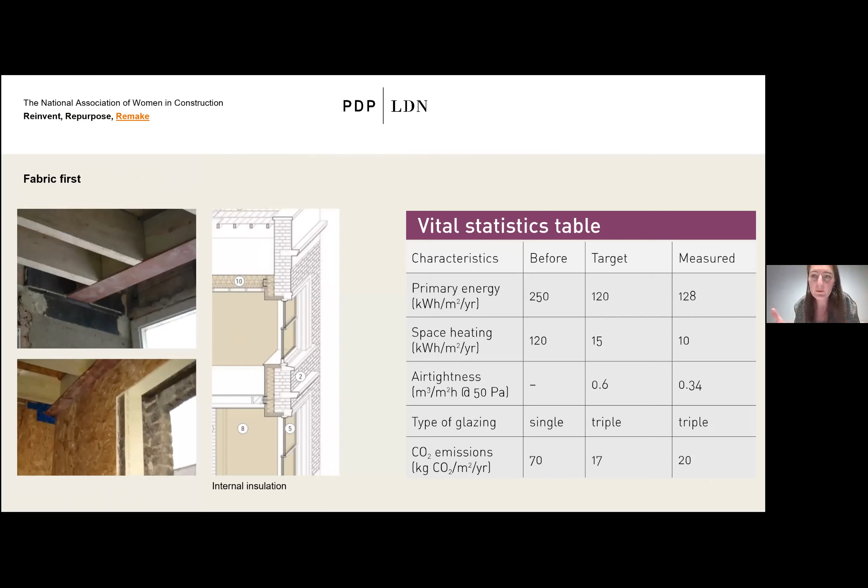The intention here was to re-insulate the entire building from the inside. So we practically gutted the house and rebuilt a house inside, and what you see is actually a sort of cladding, but that works and it absolutely maintains the appearance from the outside, the value of the cultural heritage. There is new technology helping us to do passive house in conservation areas, like for example Fineo glass, equivalent to triple glazing but only 8 mil thick.

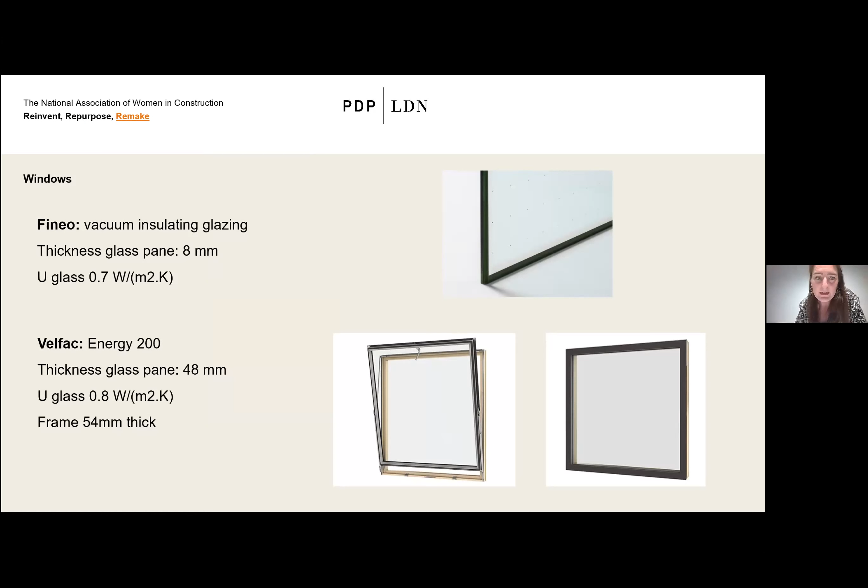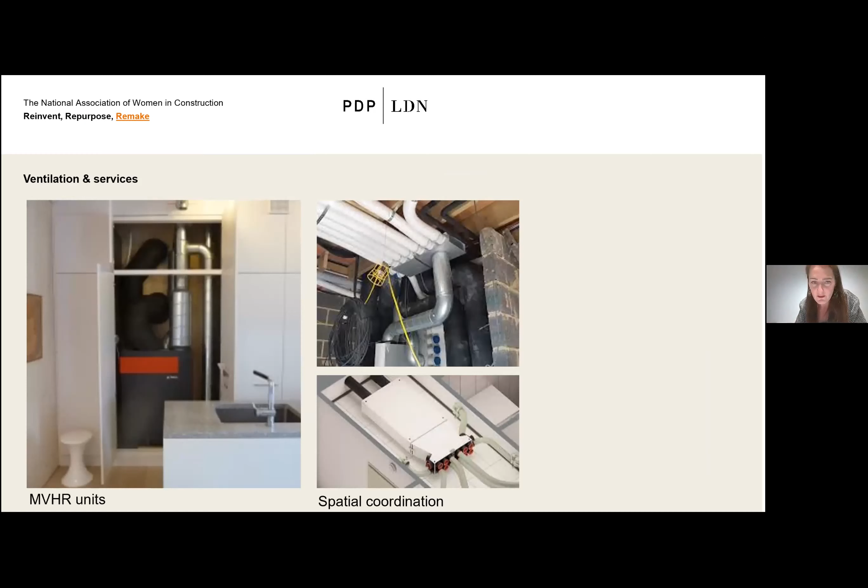Ventilation system is absolutely mandatory to do net zero carbon strategies, as is airtightness, and you're going to become in the future years the absolute kings and queens of the airtightness catalog. I can tell you that.

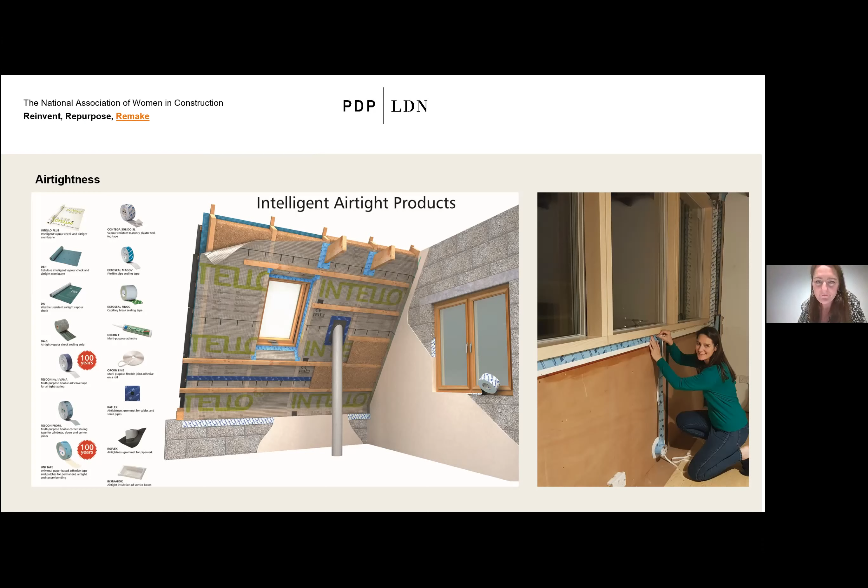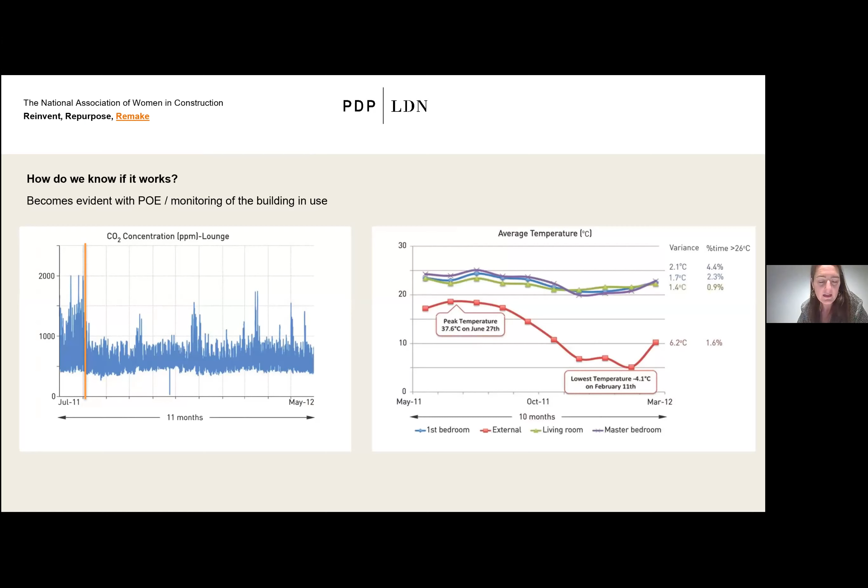How do we know that it works? We need to monitor for absolutely 2 years minimum, and you can see in these graphs on the left-hand side the effect of the MVHR starting in a retrofit, where you see the CO2 concentration really dropping significantly, proving that the whole system has worked. And the temperature on the right-hand side stays very stable no matter what the outside temperature is.

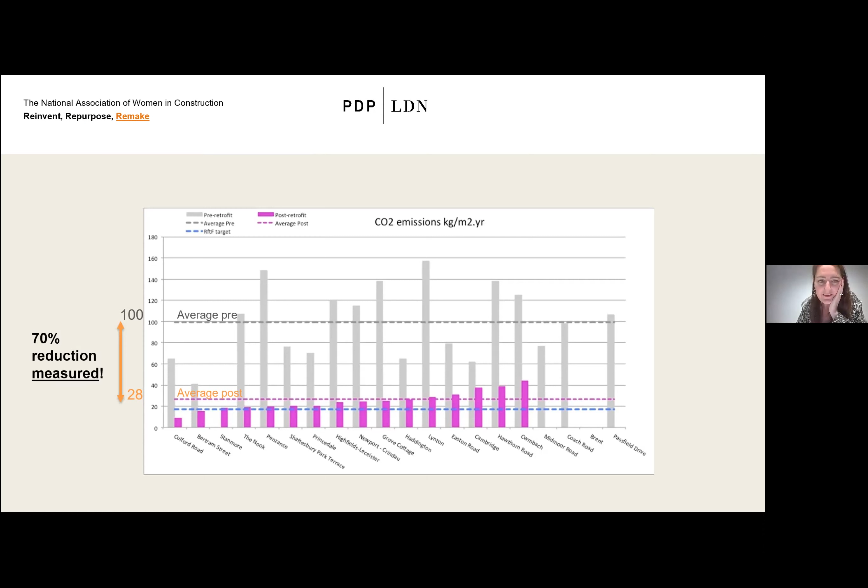I just wanted to say that retrofits and zero carbon in existing buildings is absolutely possible. There's many examples, there is a lot of training available. If we balance the cost against other savings like NHS, etc., the value of its benefits to society as a whole, we would realize it isn't much after all. So the combination of climate change and COVID-19 confinement and working from home make it more urgent than ever to make retrofit happen. Thank you very much.

That was very inspirational, 4 fantastic talks from very, very different points of view. Thank you. I want to know, was that your daughter who's training up? It wasn't a picture of my daughter, but yeah, she could well be. Right, okay.